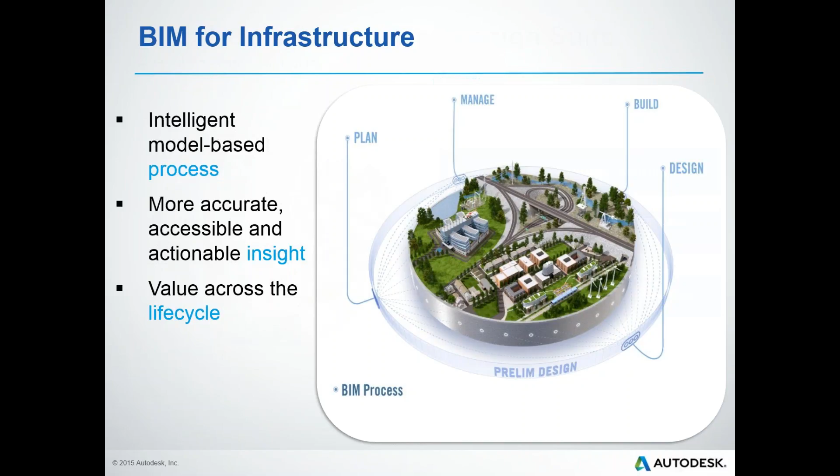So the Infrastructure Design Suite is a comprehensive BIM for infrastructure software solution that combines intelligent model-based tools that help you gain more accurate, accessible and actionable insight throughout the project's execution and life cycle, whether it's transportation, land design, utility, or water projects.

With the Infrastructure Design Suite, you can improve project delivery, maintain more consistent data, and also respond more quickly to changes within that process. Clearly, they're smarter, faster, and mobile.

So one way of improving project delivery is to build infrastructure models with the ability to access more data, incorporate detailed models from products such as Autodesk Revit, Map3D, 3ds Max, Navisworks, amongst others.

You have the ability to improve, incorporate detailed data from 2D drawings, 3D CAD models, GIS, City GML, and also raster design. So you should be able to take advantage of these types of data and integrated geospatial analysis to support any project decision that you have.

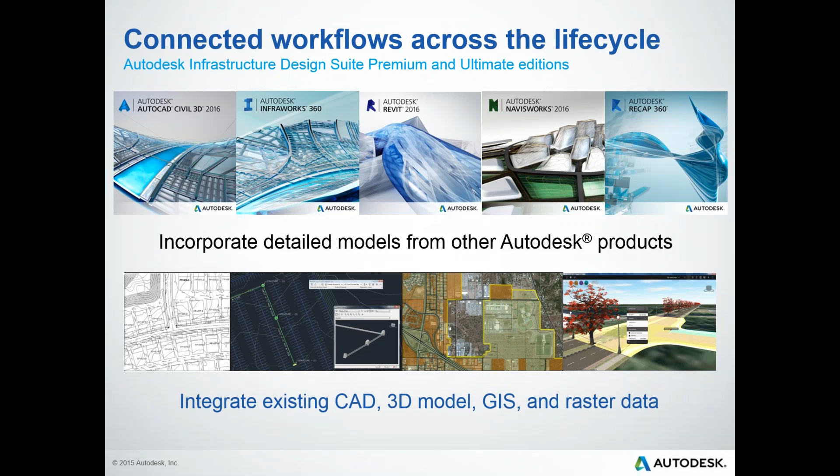Also, you'll have InfraWorks 360 available. Some of the benefits of InfraWorks 360 include foundational sketching and modeling capabilities for creating 3D models of an existing environment and generating data-rich design concepts.

So all that I just made reference to with raster design, Civil 3D, Map 3D, and Revit can be used within InfraWorks also, giving you the ability to sketch roads, bridges, and water features more directly with your model, and also being able to create proposals with design concepts within a single model.

As you know, the ability to conduct comprehensive environmental analysis is very important, and today that process is much faster. This slide illustrates how you can work with data natively from CAD and GIS data formats, including Bentley, Esri, and Esri Arc SDE managing a database, which has spatial data stored in it, also in Oracle, and then also coordinate systems. We'll take a look at some of these things. This really enables you to minimize data conversion, data loss, data copies, and stagnant data.

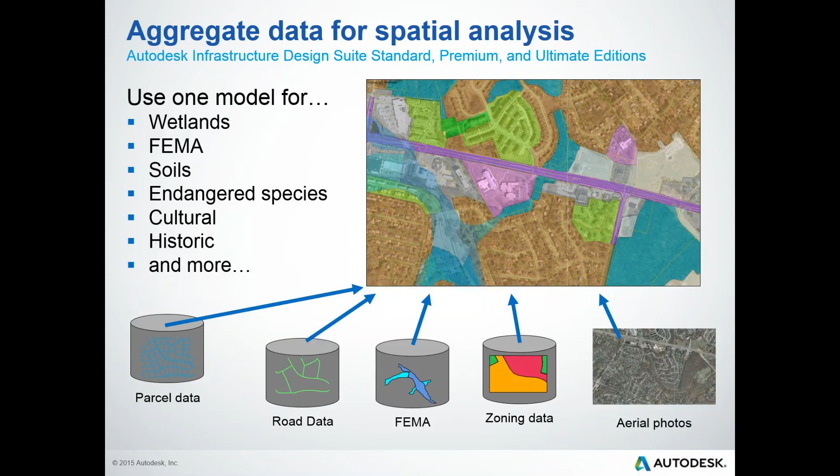Powerful visualization tools are always going to be a key component of competitive differentiation, and more quickly the ability to capture necessary project approvals. By communicating these designs for project proposals to stakeholders, we know it can be very time consuming. Within the Infrastructure Design Suite, we can complete compelling visuals developed directly from project data into the stage of your project, also near photorealistic renderings and animations to help better communicate project information to stakeholders and clients.

So we also want to be able to maintain more consistent data, context, and processes. Let me stop right back there, and we'll jump back to my current slide here.

So some of the benefits of the Infrastructure Design Suite: civil, utility, structural, automated machine guidance, sequencing and scheduling, estimation, documentation, construction simulation with Navisworks, also visualization with 3ds Max and InfraWorks 360, field survey, geospatial, and also reality capture.

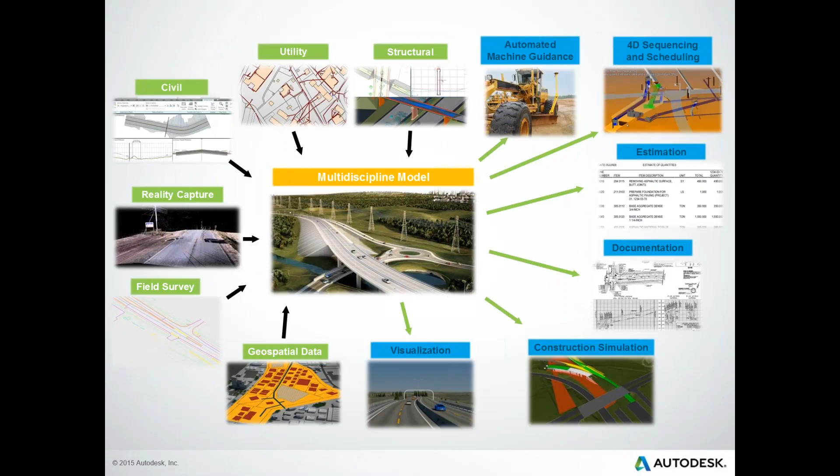Performing storm and sanitary analysis - you have tools included in the Infrastructure Design Suite, such as Autodesk Storm and Sanitary Analysis software, which helps you perform hydrology and hydraulic analysis for planning and designing urban drainage systems, including highway and sanitary sewers. Storm and sanitary analysis allows you to simulate and model complex hydrology, hydraulics, and water quality. It can be used for highways, subdivisions, bridges, culverts, sanitary, pump stations, lift stations, and force mains.

There's also a document that shows all the capabilities of SSA, which is loaded onto your machine once you load the Infrastructure Design Suite.

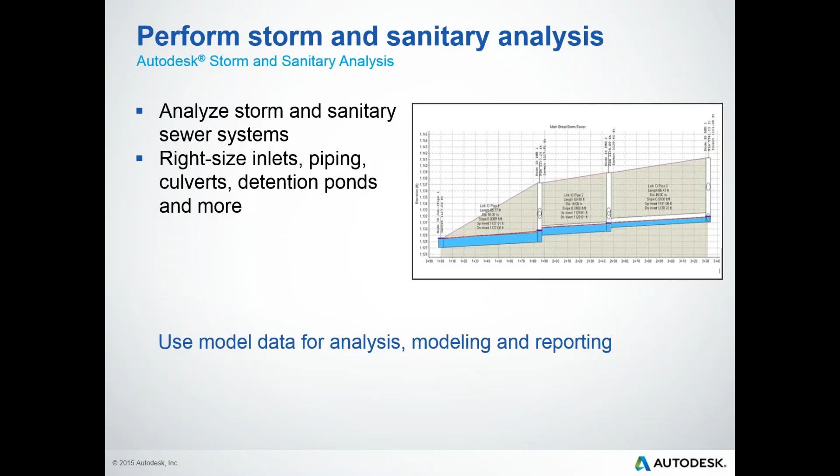You also have river analysis. With river analysis, you're able to automate HEC-RAS cross-section data, water surface analysis, floodplain mapping, and all that's related to modeling tasks. You can utilize numerous automation mapping tools, perform sophisticated bridge and culvert analysis, and also perform automated bridge scour computations for Federal Highway and State DOT studies. More importantly, you have the ability to generate floodplain and floodway maps for FEMA and other agency submittals.

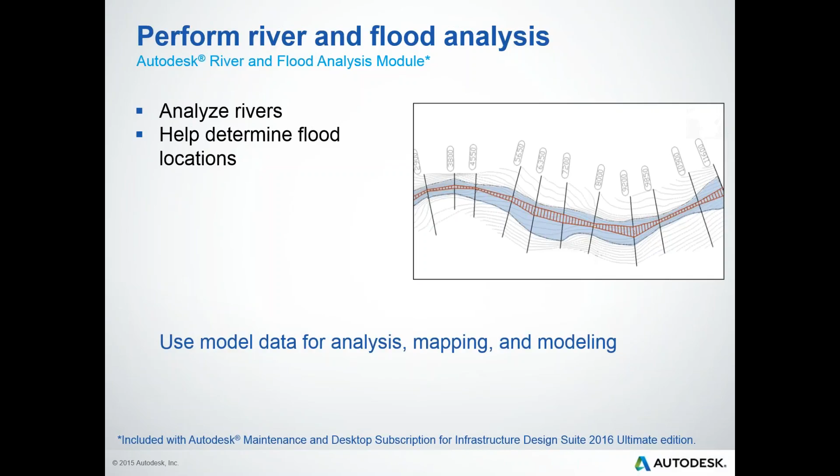You also have the ability to integrate geotechnical borehole data, streamline the import, and use in documentation of borehole data, also included in Infrastructure Design Suite.

So bridge types, girders, steel or concrete, and also bridge elements for abutments and piers, bridge decks and barriers. And then Civil 3D bridge widths, the ability to put in cross slopes based upon your corridor model, and pier and abutments.

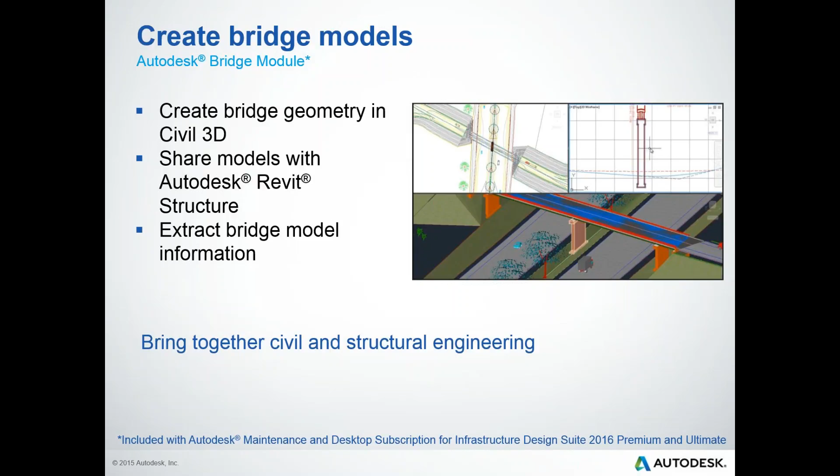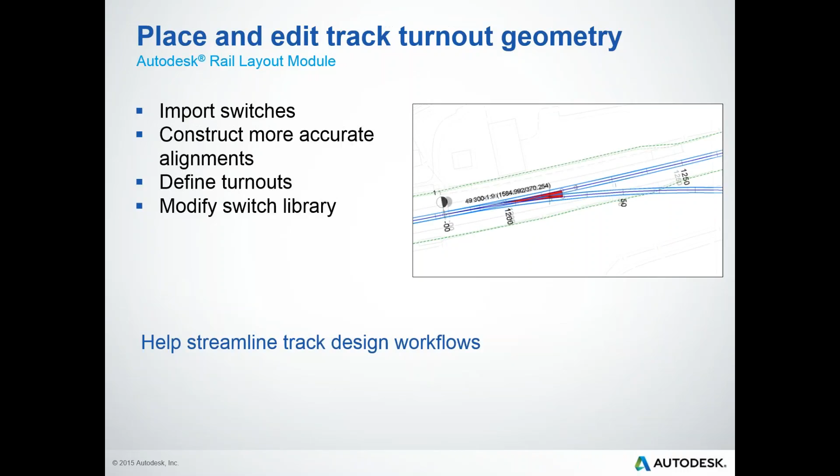Now, how do we respond more quickly using BIM and the Infrastructure Design Suite? We have the ability to design faster, incorporate faster models, even when changes happen at the last minute. Design elements such as profiles, alignments, corridors, as well as annotation labels are interrelated and dynamically linked, so when one change is made, you can quickly see its impact on the project.

For example, for design profile changes, we'll immediately see the effect in the corridor, and we'll take a look at some of those things. You also have the ability to save time and reduce numerous errors and omissions by introducing design changes rather than entering them manually.

We also have the ability to style and layer, and set up visibility standards. This gives you more time to spend optimizing your design and less time worrying about how something should look. So standards are easily imported from a template to allow you to get more work done.

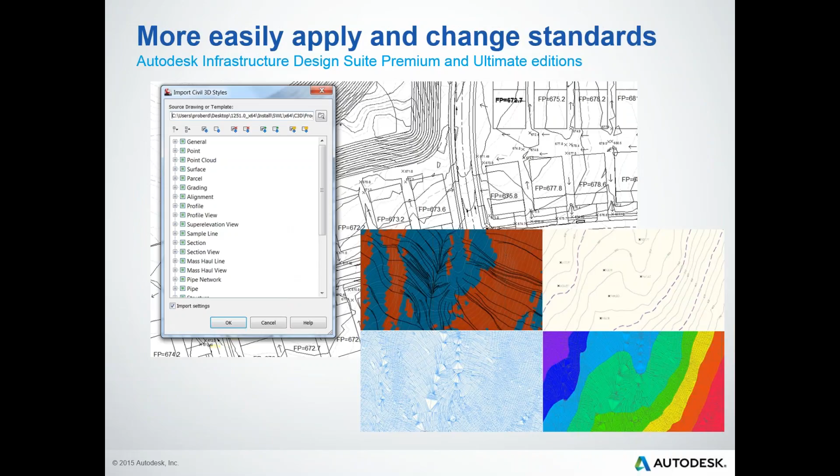We also have simulate 4D construction, the ability to perform quick quantity takeoffs, model and compute earthwork volumes, and deliver high quality models to contractors. Simulate construction processes and 4D construction sequences to optimize staging and scheduling. And then, of course, delivering construction documents for projects that could be time-consuming, error-prone.

Again, the ripple effect through related design changes are throughout Civil 3D. So, and then also being able to use built-in wizards that allow you to take advantage of management tools, configurable styles, standards, and sheets and sheet sets.

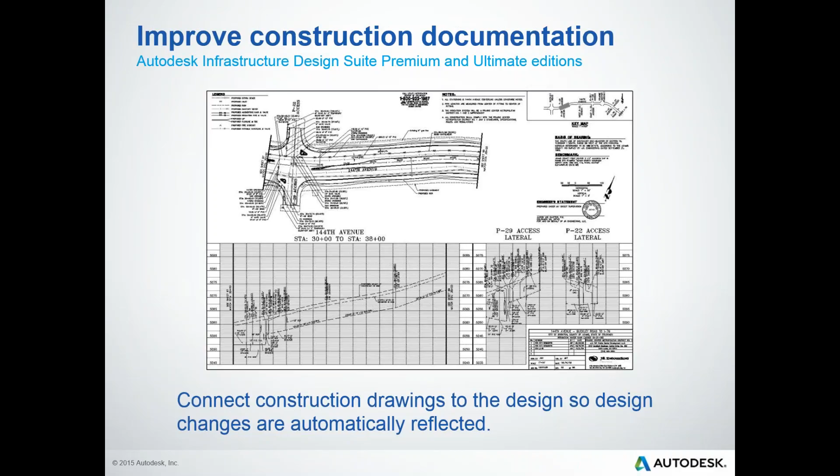Also included in the Infrastructure Design Suite, we have Navisworks. Within Navisworks, we can utilize clash detection, interference management capabilities. If interferences are identified, the link back to the Civil 3D model enables engineers to more quickly update designs and documentation. So projects holistically model constructability and perform clash detection. With teams, you can more effectively identify errors early in the process to help you minimize project delays and rework.

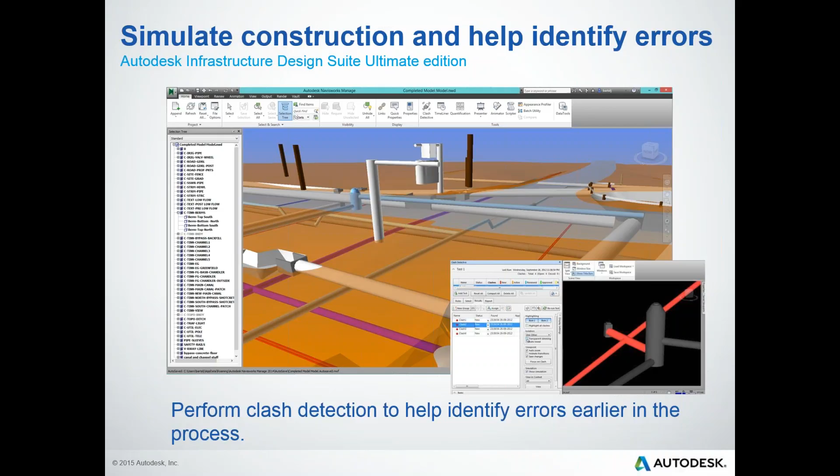Also, we have design electrical distribution networks, design overhead and underground structures, electrical components, built-in configurable rules, workflows, and standards, and also conduct engineering analysis to size facilities. So really the ability to improve design accuracy, analyze, optimize networks for greater performance and reliability.

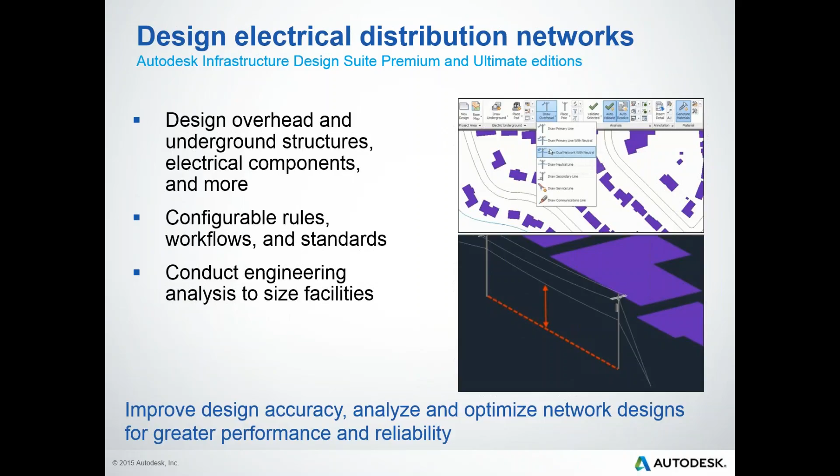We also have a more comprehensive BIM workflow in reference to using intelligent industry models straight out of the box with the Infrastructure Design Suite. So GIS and asset management, network analysis, and connected facilities.

More comprehensive BIM workflows. So let's start with InfraWorks 360. You can go anywhere in the world, grab aerial photography, topo data, road information, anywhere in the world.

In the early stages of an infrastructure project, teams can more efficiently generate quality comments and have a solid understanding of design concepts with InfraWorks 360, collectively with Civil 3D. Again, InfraWorks 360 offers a foundational sketching and modeling capability. Also, you can more quickly develop design concepts in detail to help stakeholders better decide for possible projects.

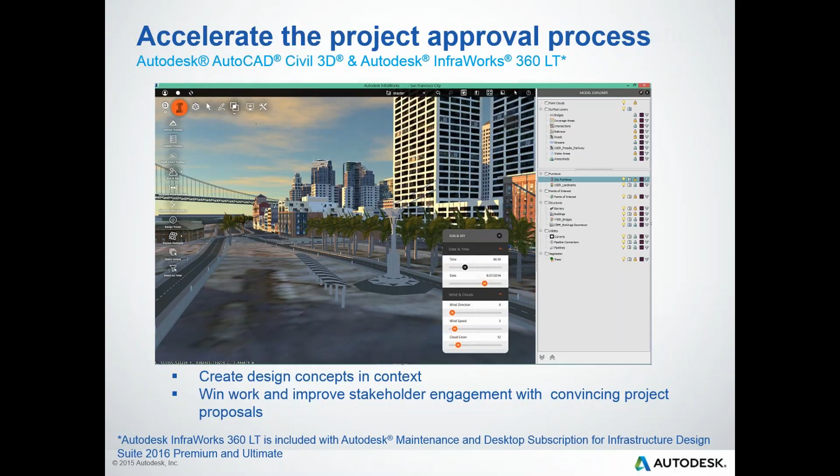Once an agreement can be reached, then you can push that data straight from InfraWorks into Civil 3D, where you can model, analyze, and document that data that came from InfraWorks. Also from Revit.

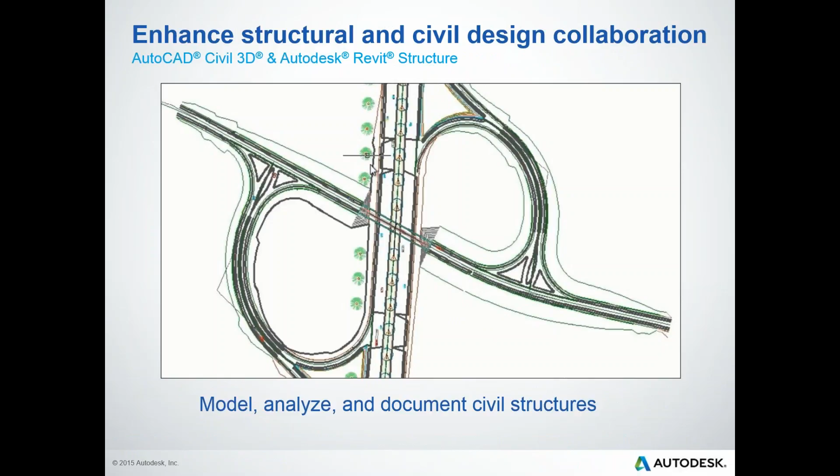And last but not least, you also have the ability to work with 3ds Max. By making visualization an integral part of your design process, teams can better evaluate and communicate design stages also. Content in 3ds Max retains its relationship with the 3D model from Civil 3D.

As the project evolves and the design model is refined, those changes can be easily incorporated back into the existing visualization, minimizing the need to rebuild over and over again.

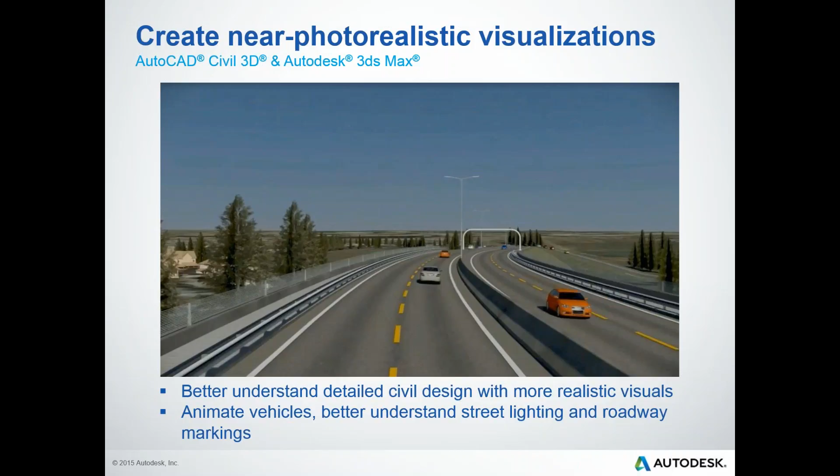And not only can Navisworks simulate as a part of the Infrastructure Design Suite, also with InfraWorks 360, you have the ability to utilize traffic analysis.

And last but not least, also using raster imagery, creating vector objects, text from scanned drawings, other images, old TIFF images, cleaning up raster images with image editing tools, also the ability to edit, transform, and create georeferenced images. Raster being used on any AutoCAD platform.

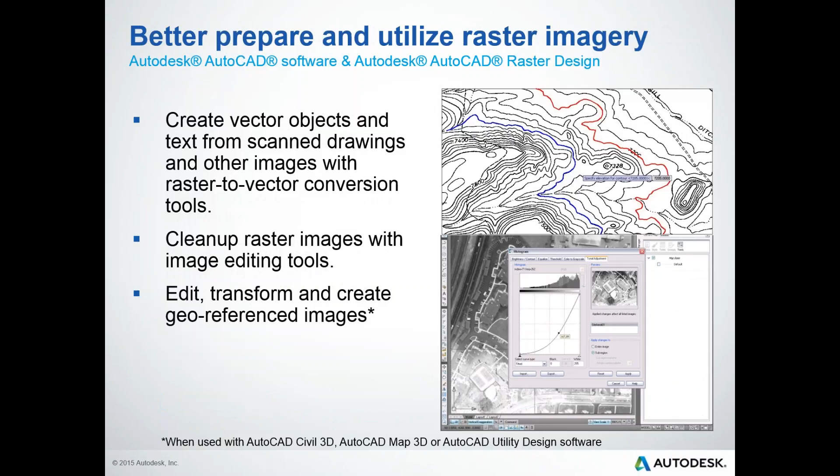And not only do you have those numerous products, you also have AutoCAD Utility Design. Coupled with Map3D, the ability to run queries for existing GIS and asset information into CAD, also design new and updated utility networks, and also tie into an asset database so you can edit, modify, and also design from as-built information.

Clearly, a common challenge is always updating as-built records once a project is complete. This is where Map3D and AutoCAD Utility Design can really help.

Hypothetical project, typical processes outlined: establish connection to GIS database, set up mapping, design new distribution network. When the design is complete, reconnect to the database and merge those changes.

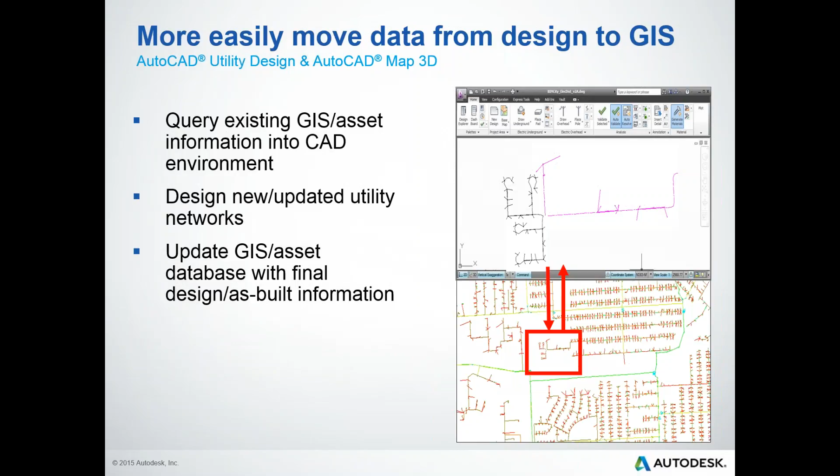Clearly, visualization from InfraWorks, we'll take a look at that also. I'll go back. Clearly, visualization from InfraWorks, more economical and convenient. Ability to access data, utilities underground.

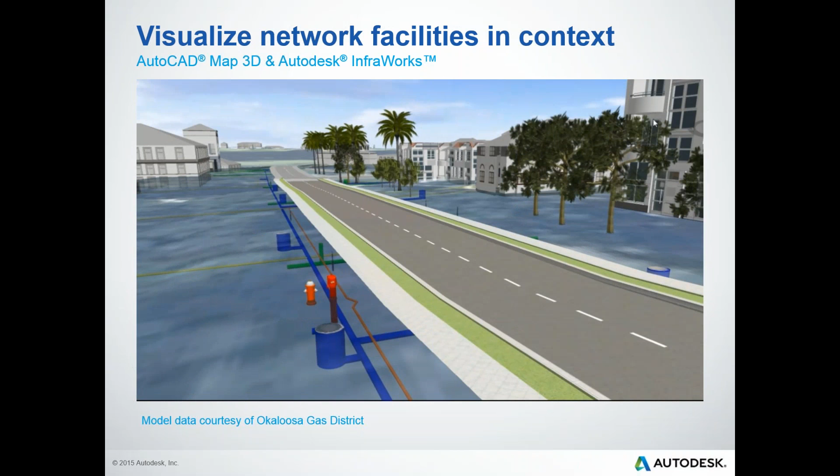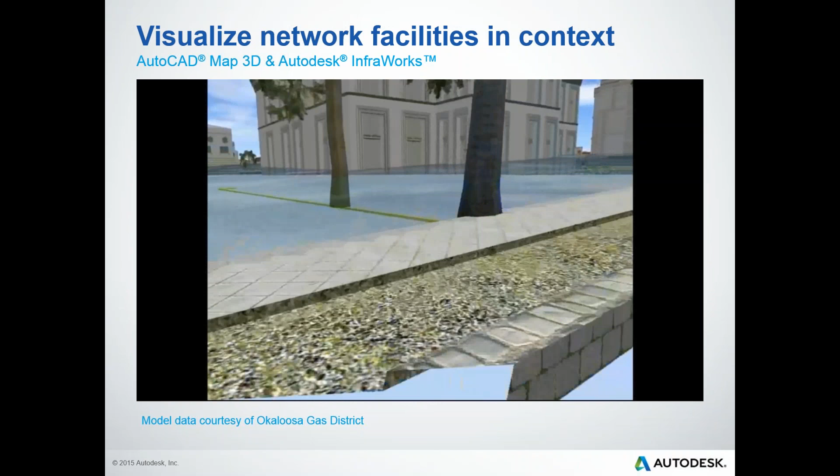So as the owner and manager of this data, you want to be able to respond to requests for information. It's important to provide requesters with accurate data so they can better understand as-built information and communicate that to stakeholders. These requests could be from operations to maintenance teams to scheduling maintenance activities. So again, whether it's utilities, city departments, or a private contractor, you have the ability to provide them with a network of information that makes it easier to understand.

Clearly with Map3D, you also have the ability for GIS back and forth from Esri.

So you really could provide a compelling 3D visualization that helps individuals or recipients to better understand all these results in reference to this model.

The Infrastructure Design Suite has a standard, a premium, and ultimate part. And then clearly, we want to be able to talk about Civil 3D and the Infrastructure Design Suite demo.

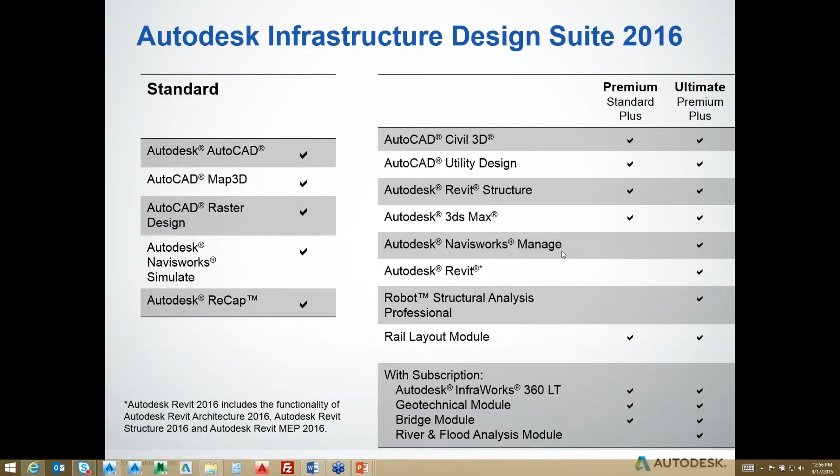So what I want to be able to do is, because I don't like to PowerPoint to death, just go through a few things in reference to some of the tools that you get with the Infrastructure Design Suite.

So clearly we have Civil 3D here. And one of the things we want to take a look at is the ability to bring in data.

Let's think about what we typically get. Let's say we have an architect and he gives us this kind of temporary site plan.

One of the things that we are able to do, I'm just going to open up a drawing as if I got a temporary site plan. So let me come in here and make it nice and simple.

So this is the typical workflow that a user would possibly go through. I'm just going to go to my AutoCAD workflow, and then this simple drawing - we have a building plan here.

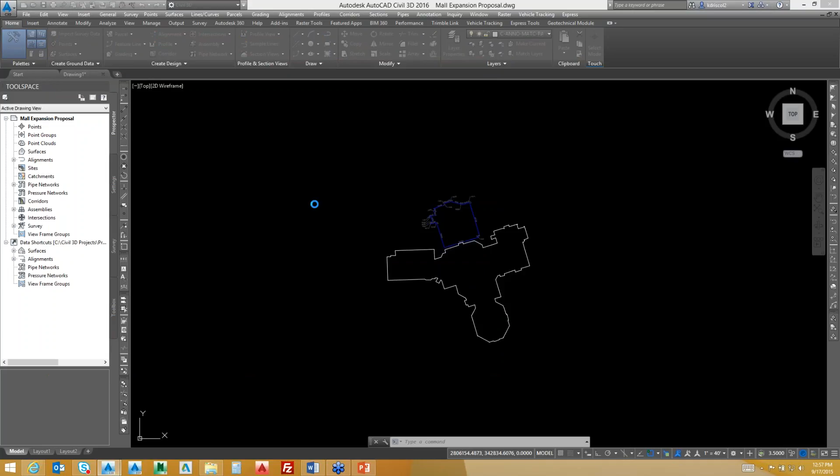One of the things we want to do is, this mall has an expansion that's planned, a proposed expansion, and we also want to produce a proposed intersection and layout.

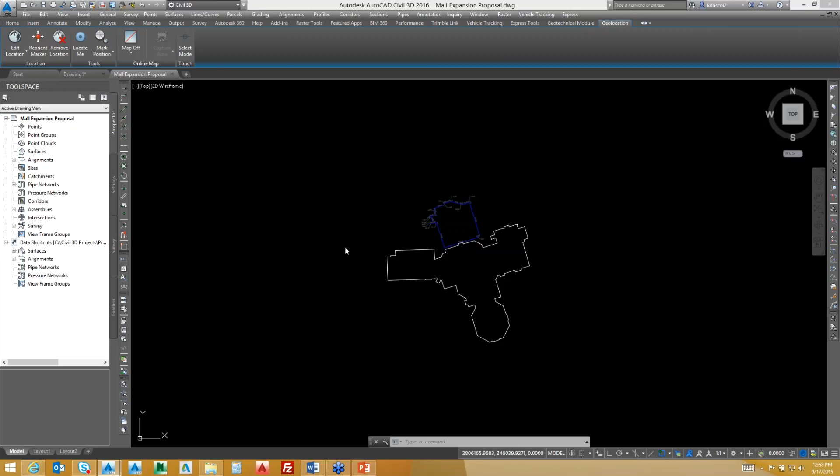So one of the things I want to do, I'm going to open up another drawing. I've just received this drawing from an architect who's got some distances measured. Let me zoom in - it's got some distances measured across in terms of a quick little site plan.

But as a civil designer or engineer, now I need to come in. So one of the things we want to be able to do is create this intersection of this road here, and then also create center lines for this road, and then what this building would look like.

So this project was done at some point, so we have kind of this site plan. The first thing I want to be able to do is utilize some project data. The data comes from Esri, MicroStation, and other file formats.

So to show you how flexible you're able to work within Civil 3D, I'm just going to go to my project data. Let me just pick on that.

One of the really nice things that you're able to do with Civil 3D and data - I'm going to come to my base data right here. I have shape files, I have a surface file.

So just as an example, if I go into my shape files within Civil 3D - and you do know that Civil 3D is built on AutoCAD and Map 3D - the first thing I want to be able to do is, I just want the ability to bring in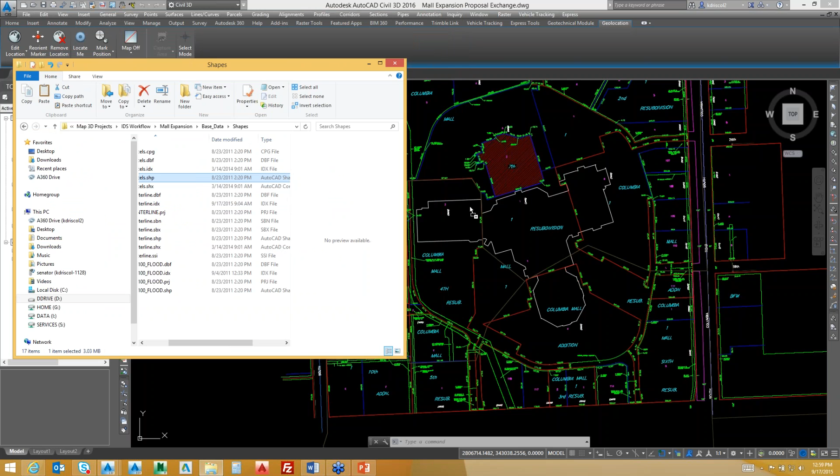some parcel data, just to make myself aware of what's going on. So I do have the ability to bring in parcel data with Civil 3D, and that parcel data is a shape file.

So again, I want to really try to develop a concept plan. Civil 3D is built on top of Map 3D, and as you will see, as I pull in data, I'm just going to click on my map task pane.

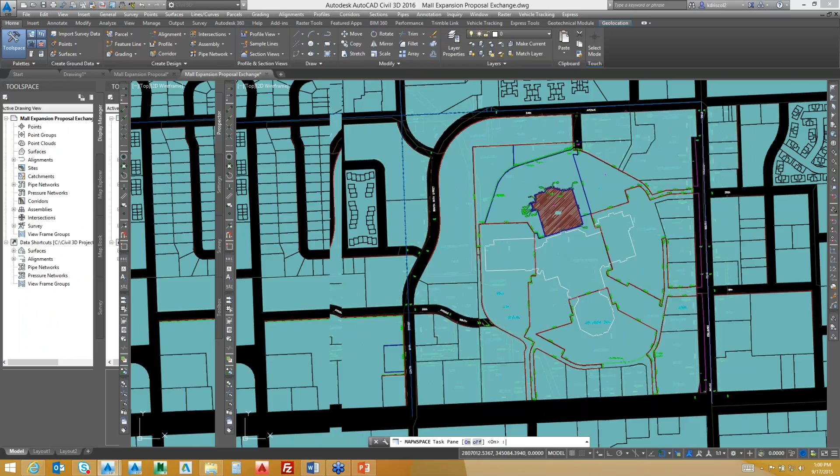So something real quick, you can see that I have city parcels. One of the things Map 3D allows you to do, for quick access, is stylize based upon attributed data brought in from an Esri shape file. So under property, maybe I want to select zoning. I have a PUD, so under PUD name, I'm just going to put it in, and select OK.

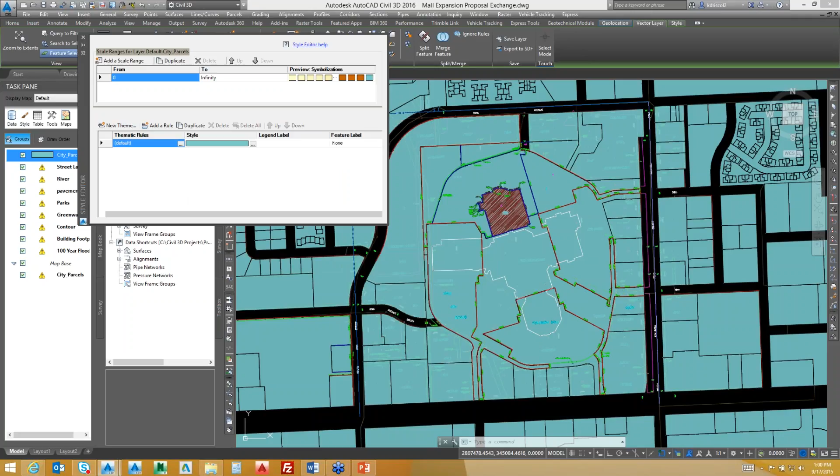So whether it's a university, a village, Valley Memorial Homes, or a campus, all these can be accessed and displayed in my map.

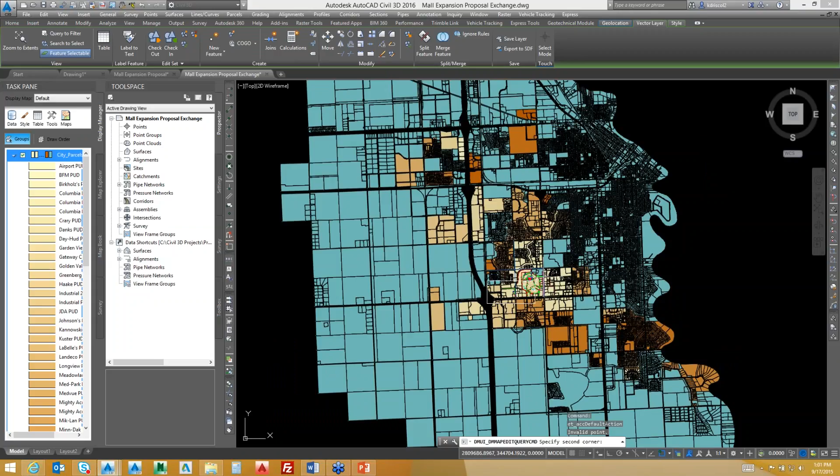The beauty of working with Map 3D is sometimes you just want to work with data within a specific area. So you have the ability to go in and select a location map. Anything inside of this area I want to use with my mapping. Pretty straightforward.

And if I wanted to cut that off, it's pretty straightforward. So the ability to drag and drop data specifically onto my map gives me a lot of flexibility.

So go back to base data. Maybe I'm talking SDF files. One of the things I need to be able to do is define what this site looks like. So I just have a DTM contours SDF, spatial data format, and I'll just drag it right in. Here's my contour map. Pretty straightforward.

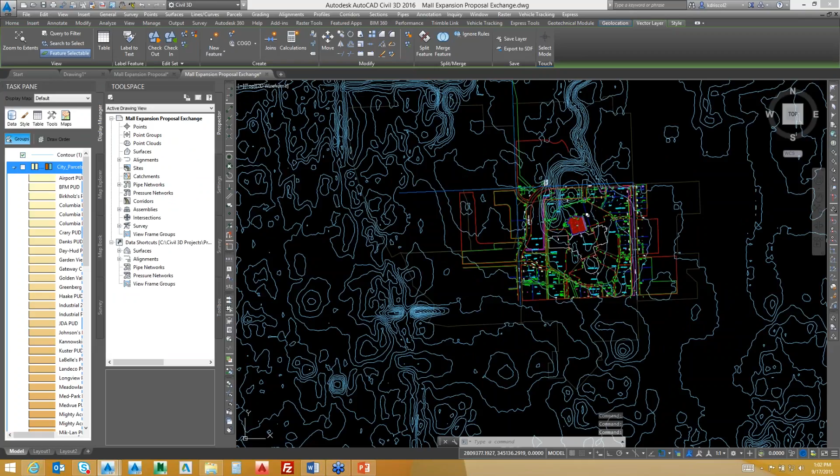There's flexibility in reference to the data you're working with in terms of Map 3D to develop this concept plan. So at any point in time, I could cut those contours off.

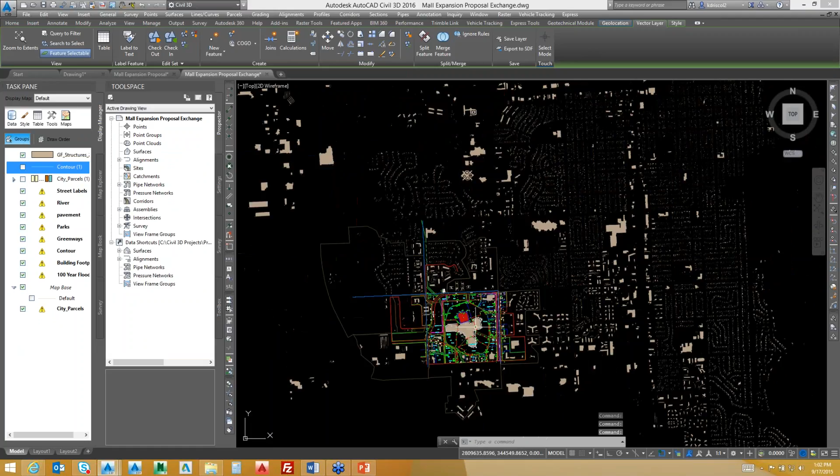I have the ability to drag in layers of information, just dragging and dropping. So even if I wanted to drag and bring in all the buildings in a specific area, I have a lot of flexibility in creating this concept map that I'm working on.

So we've seen those contours. One of the things I want to do is develop a topo from those contours. So what I've done, for time purposes, I'm going to start working with Civil 3D now. I really don't need my map pane up.

I know I can bring in pavement, generate flood plains. A floodplain, something as simple as a 100-year flood, I can bring that data in also to delineate what's going on with my site.

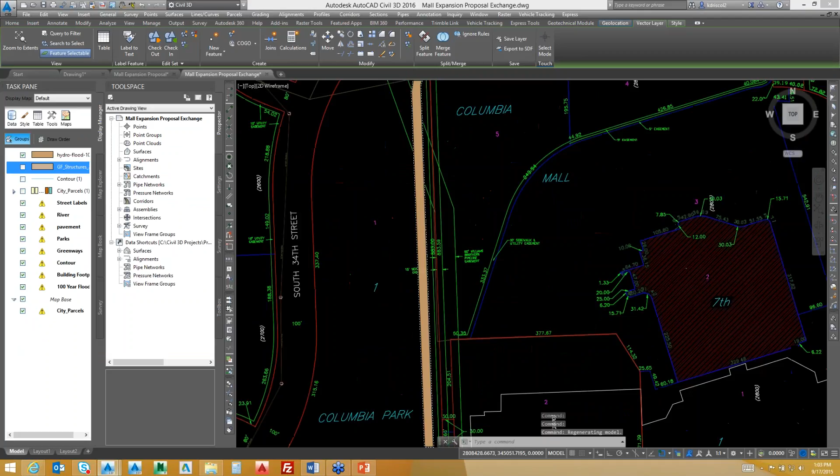Again, a lot of flexibility in terms of what you want to display as you're creating this concept plan. So now let's think about what we can do with Civil 3D. Because we have the map functionality, I can bring in parks, greenways, pipes, pipe networks, river locations, 100-year flood plains. We know we can do that.

But now we're looking at working with Civil 3D, so we're beyond the map part. Now we want to bring in data to do detailed design. So one of the first things I want to do is bring in some points. I'm just going to select my little handy button here, import points.

Before I import these points, one of the things we typically run into is we just open up a drawing and say, okay, I'm ready to start. But working with Civil 3D, we want to slow down and consider that Civil 3D works with the idea of styles and how things are presented. And you can clearly see I got this drawing from an architect, so I just have really an AutoCAD drawing.

So what I want to be able to do is, one of the things I mentioned in the PowerPoint, is you have the ability to pull in a template that gives you styles so you can have standards to represent your company. So I'm just going to save this drawing, no big deal, just a quick save there.

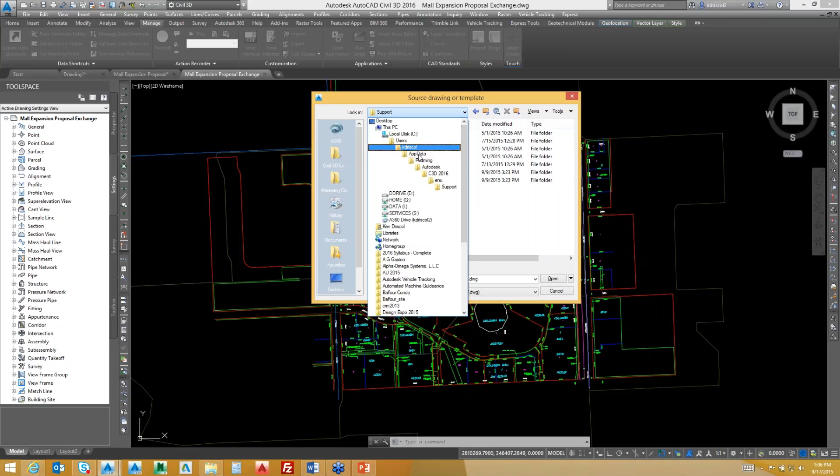And then if I come back to my local, application data, local, Autodesk C3D 2016 ENU, under template, I can pull this AutoCAD Civil 3D template. Clearly, we don't have any styles in this drawing, so I'm just going to select open.

It's going to run the process of analyzing that drawing, and then show me all the different styles that are going to be added to my drawing. I'm just going to select OK, then select OK again. And a couple seconds later, you can see the little bar down there accumulating and importing styles.

Then it's verifying those imported settings that it's pulling in, and it says successfully imported 543 styles, 1,400 settings. Then I'll select OK. That's all I have to do to bring in styles into Civil 3D.

One of the most fundamental headaches that users who work with Civil 3D face is that they get drawings from users who don't have Civil 3D, and then they have to create all their styles. This is the simplest way to get all the information from a Civil 3D template that you can utilize in a BIM environment quickly. So now that I have all my styles, I'm ready to bring in some points.

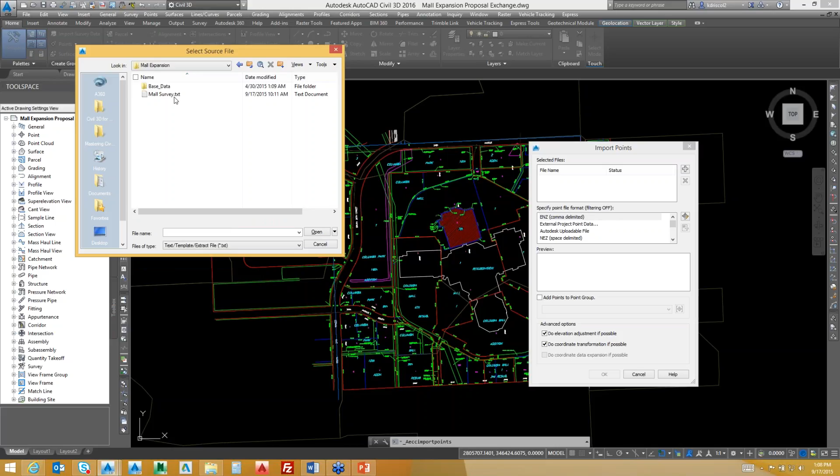The idea behind points is so I can generate a topo survey from my points. So again, up at the top, I'm going to import points. I'm going to come to my folder here, and I'm just kind of jumping around, which is what a typical user would be doing, to find data. So I'm going to go in and find the Mall Survey, and I'm just going to select open.

And then what Civil 3D wants you to do is match the data in reference to the file to this file format that can be brought straight into Civil 3D. I'll just select OK, and it'll take a second here. And now you can see some form of dots that have been generated on my drawing.

Again, because this drawing was created with Map 3D, it's kind of set up for everything that's standard. But if I come to my Prospector tab and go to Point Groups, All Point Groups, I'm going to right-click and go to Properties. As you can see, it's imported all my points into my drawing that has elevations for me to generate the topo. I'll select OK.

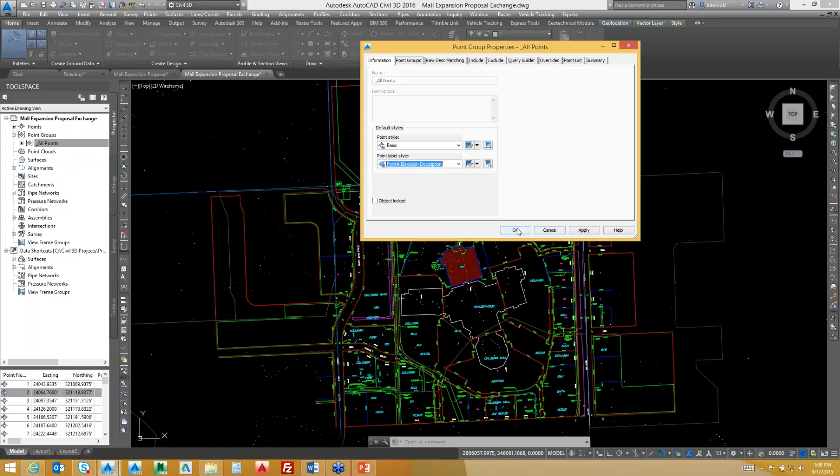I'll right-click on all points, go to Properties. I'll go ahead and set up now how I want my points to be displayed. I'm just going to say Point Style Basic, and then I'm going to select Point Number, Elevation, and Description. I'll go ahead and select OK, and it'll take a second.

So now these points look a little bit different, but they're still minuscule in terms of size. So again, coming from that AutoCAD drawing that someone gave me, I maybe just want to come in here and change my scale in terms of what I wanted to utilize. Right here, I don't have a scale that's set for imperial and decimal, so I'm just going to create a custom scale. I'll come in and add, and I'll say I want a scale that 1 inch equals 50 feet.

And I'll just say 50 feet, and select OK. Then I'll come in and select that scale, 1 inch equals 50 feet. It'll take a second. And one of the things in the PowerPoint that I mentioned is that everything's dynamic, it's related. So now the scale of my drawing, any of my labels or my text, dynamically updates.

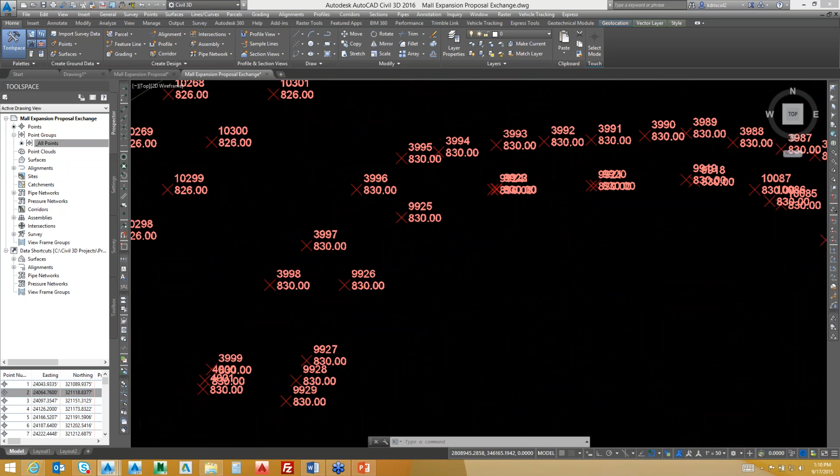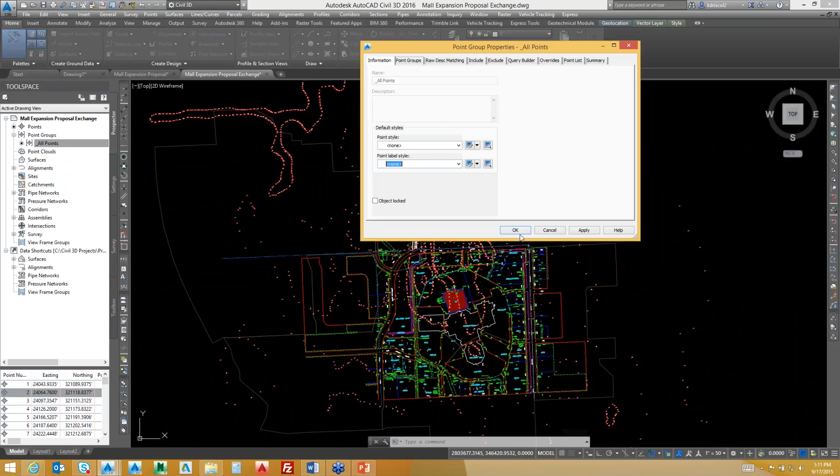Okay, so now that I have my points, and I really don't need to display these points, I just wanted you to see the ability to scale these points on the fly dynamically. So I'll just go right back under points, go into properties. I'm going to select none, and then select none again, because I don't really need to see my points, since the idea behind what we want to get across with the Infrastructure Design Suite is that we're moving to this BIM process in terms of things that we're building.

So we want to build this model based upon points. I'll just go over here on the surfaces, select create a surface, and I'm going to call that existing topo. 2 and 10 background is going to be fine for my style, I'm just going to go ahead and select OK. I'm going to go over to my Prospector tab, expand my existing topo, and then I just want to build that topo based upon the point group that I just brought in called all points. I'm going to select OK.

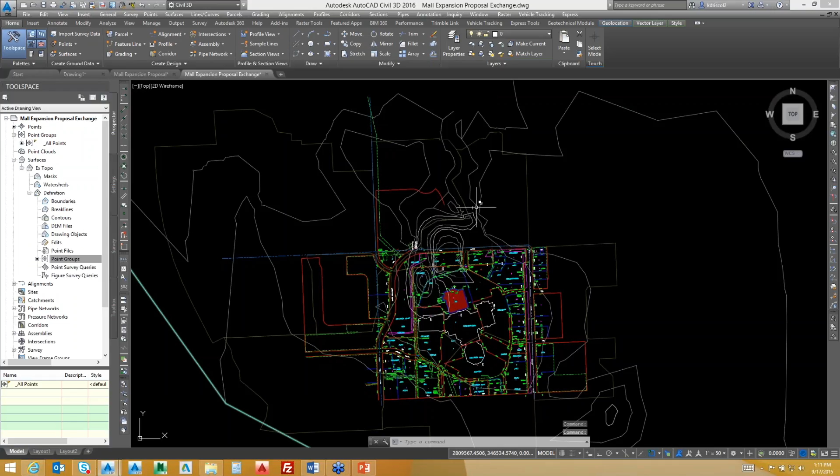Existing topo. So pretty straightforward, but now I have this model built. And I can get really defined in terms of what I want to do, but you can clearly see that there's a topo for a site that's built there.

One of the things I wanted to be able to do is bring up this intersection down here. With Map 3D, we're able to bring in our building expansion for the mall, so we have a location there. If I pick on it, you can see there's just line work that's been brought in for my location of the mall, dimensioned out right on top of where the architect wanted it to be.

And now, since I'm in design mode, I want to look at this intersection. What I want to be able to do is insert a block, because, you know, I could go back to Map and kind of drag in pavement.

If I go back one time, under shapes, I can come in here and say I want all my center lines. There's my center lines. But what I've done, I'll just undo that one back, is I've just created a small center line area based upon that shape file, because I can extract from it.

One of the really nice things you can do now in 2015 and 16, if I pick on my shape file and right click, you can check this feature out, and you can also edit this feature. So you can see that it has geospatial data contained in my features that you're able to utilize now within Map 3D and Civil 3D.

So I'm just going to come back and insert a quick block. We all know how to do that in AutoCAD. I'll insert a quick block called center lines, and I don't need to specify it on screen, I'll just pop it right in there. So there's my block. I'm just going to explode it one time, no big deal. I've got a center line here, and I've got one here.

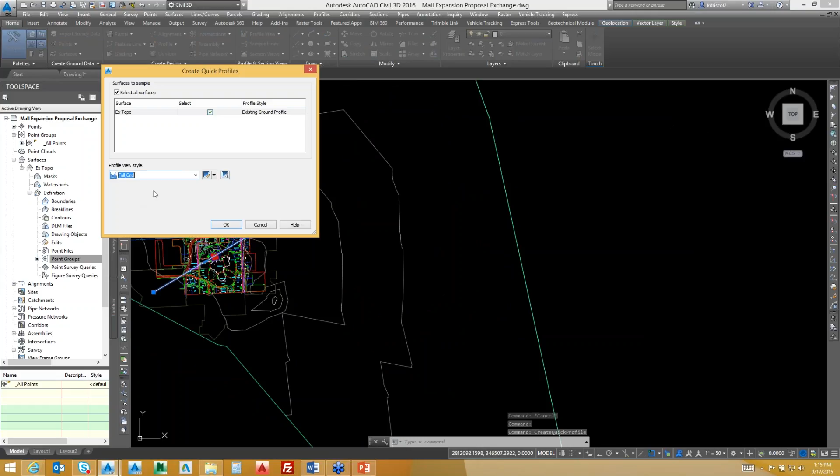So the idea behind BIM, building information modeling, is if I did something as simple as this, drew a line through the site, picked on this line, I come right over here and say I want to do a quick profile. A quick profile, meaning an actual profile of this site? I can generate an actual profile. So if I come back, pick on that, just erase that line, and it erases my profile.

If I come to my existing ground topo, I'll come to surface properties, and you can see I have modeling information that's been built. So the idea behind BIM and information modeling is we're building models.

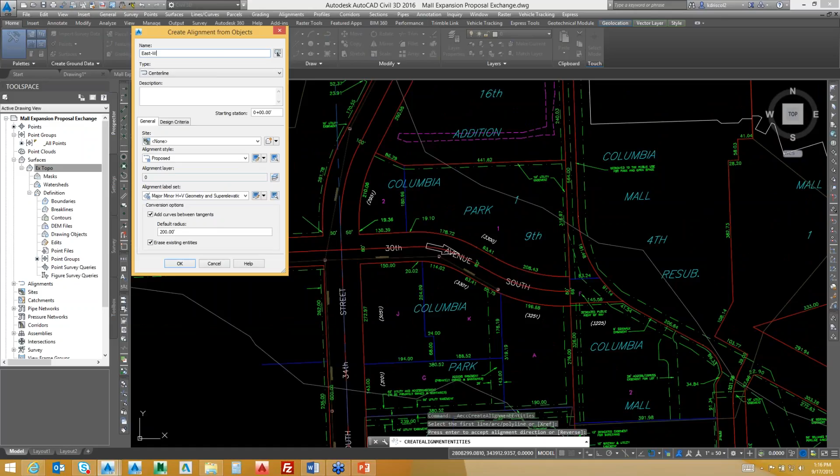So if I zoom in, if I pick on my polyline, I just want to create an alignment from it. I'm going to create an alignment from polyline, pick on it, and it shows me the direction it's flowing. I'm just going to hit enter. I could give it design-based criteria if I wanted to, but I'm just going to call this east-west, and it creates my alignment. Pretty straightforward, I can generate horizontal geometry that quick within Civil 3D.

I'm going to create another alignment from a polyline. I'll pick on it, it's showing me my direction arrow, and I'm going to hit enter. That's acceptable, I'm going to call this north-south. I'll select OK. I got some exclamation points there, which really make reference to my design-based criteria, and I'm not even going to use that in reference to my alignments, so no big deal.

The thing I want to be able to do is generate a profile. So if I pick on my alignment, or go up here to the top under profiles, I'm going to select create profile from a surface. It shows me my east-west alignment and also my north-south. I'm just going to use east-west first, add the topo, draw it in a profile view, then select first view, and select create profile view, and pop it in right there.

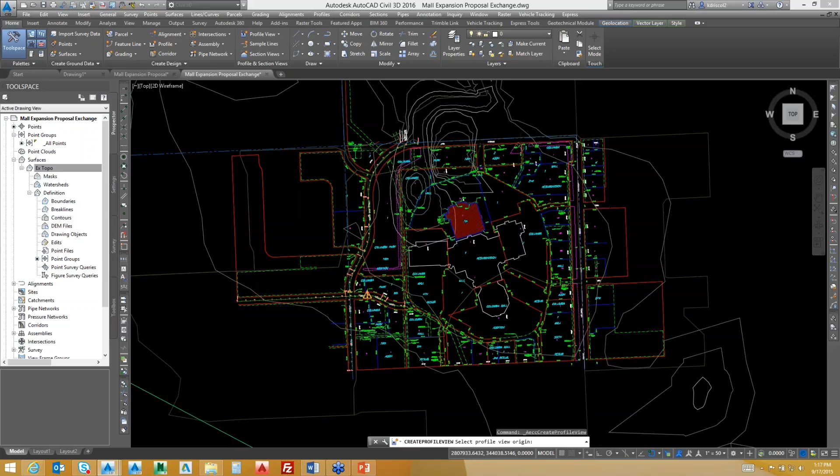So this profile, I'm creating a profile here. I also want to create a profile for my north-south alignment, so I add to it and draw it in a profile view. If you look in here, you can see the minimum and maximum. I'm just going to do something quick for time purposes. You can see if I go next, it shows me the length of my alignment, and then the profile height. Then I'll click on my profile display options, then existing, and select create profile view. So no big deal, create profile view.

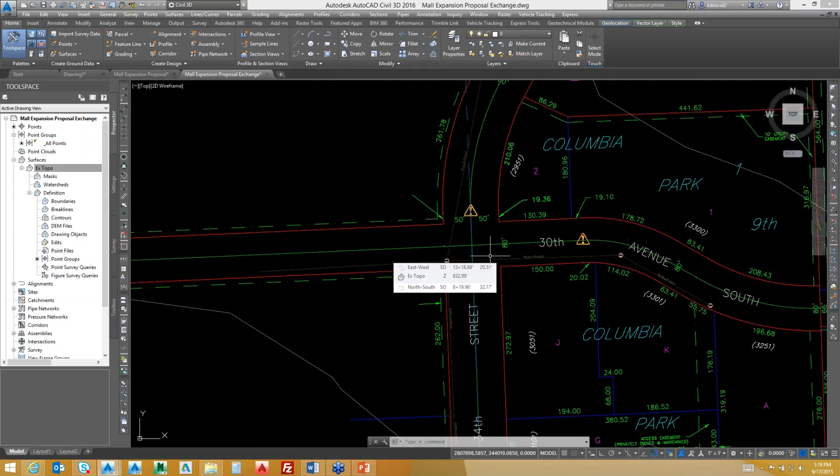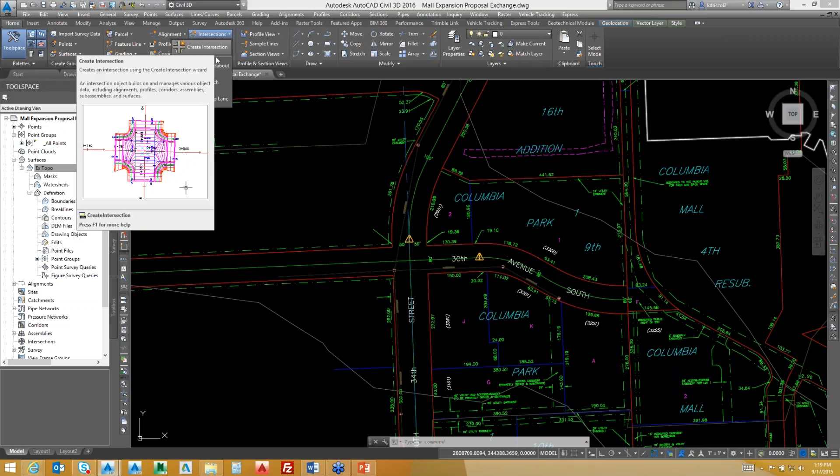So straight out of the box of Civil 3D, I'll just come up here and select create intersections. Clearly I can go in and define my finished grade for my intersections, which would be typical in terms of creating a finished grade, but I just want to create this intersection. You see I can hold my cursor here and it's showing my intersection in terms of what it would look like. So just as an example, because we have time parameters, I'm going to create this intersection without creating my finished grades.

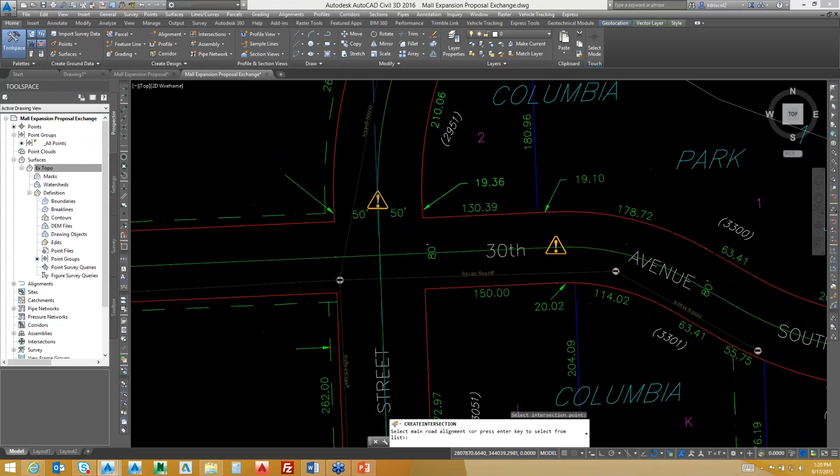Just want to see what it looks like, because we want to be able to do things really quick and professional. So I'm just going to select my intersection point, my two alignments crossing. Then I'm going to pick my east-west road first. And then it brings up this dialog box, and it says we're going to have an intersection here, and we can have it primary road crown or all crowns maintained. So I'm going to go extreme and say primary road crown maintained.

Then I'll go next, and it's grabbing my information automatically based upon what I created from my alignment and my profile. Again, the idea behind BIM is it's part of a process in terms of a model being built, and then you utilizing the data that's contained in the model. So I can go in and change my curve returns, as simple as that, and then it's going to grab information from my sub-assemblies that are right out of the box.

Then I'll just go ahead and select create. And then it says, well, wait a minute, you have specified dynamic profiles for secondary roads, what do you want to do? I don't have a finished design profile, so I'm just going to create intersections with dynamic profiles. I'm going to let it do it, because they may not match and they may cause uneven surfaces. But I just want to get an idea of some of the tools in reference to BIM.

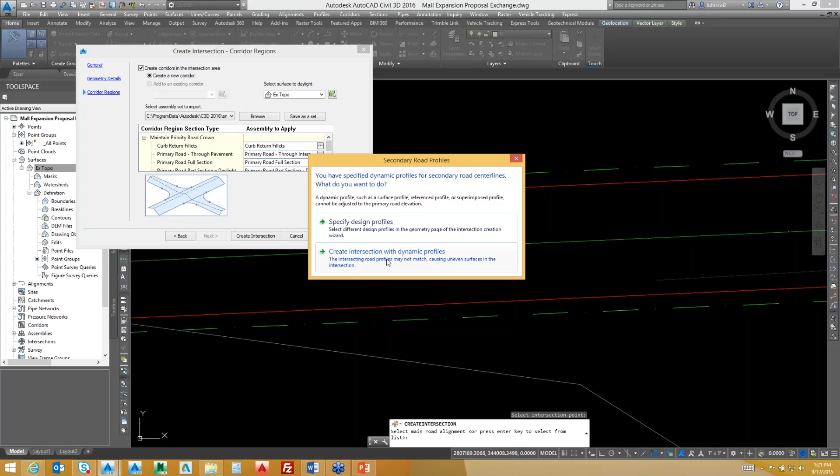So I'll select create intersection. And clearly, I'm not on the intersection, so it gave me a couple things in reference to what's not found. But for the most part, it's created that intersection. So how long does it really take you to do that and build a model in AutoCAD or in one of these other products that may be out there?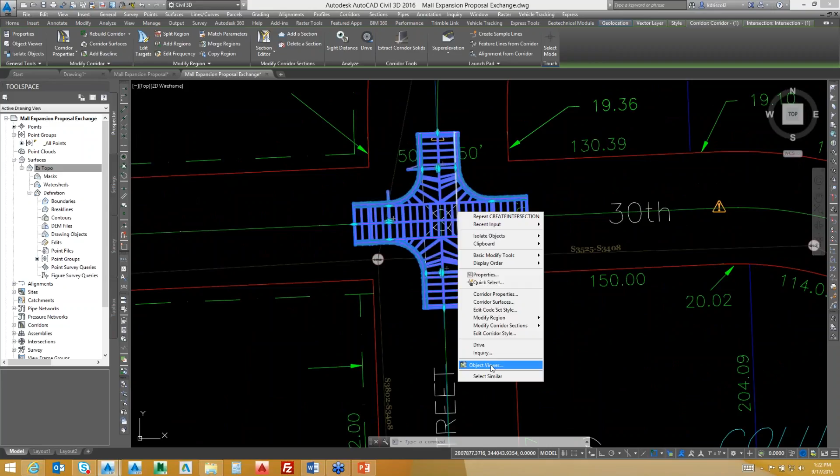So if I go ahead and select Object Viewer, you can see not only did it create that intersection, but it also rendered it. And if I zoom in, you can see not only my intersection, but you can see curb and gutter also.

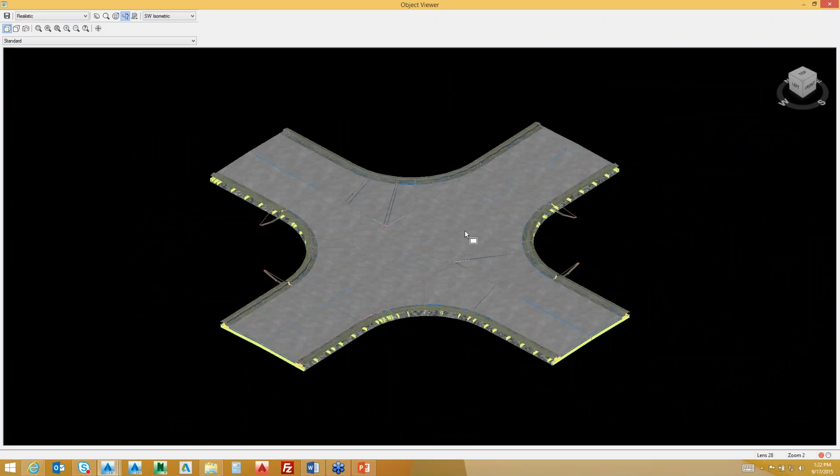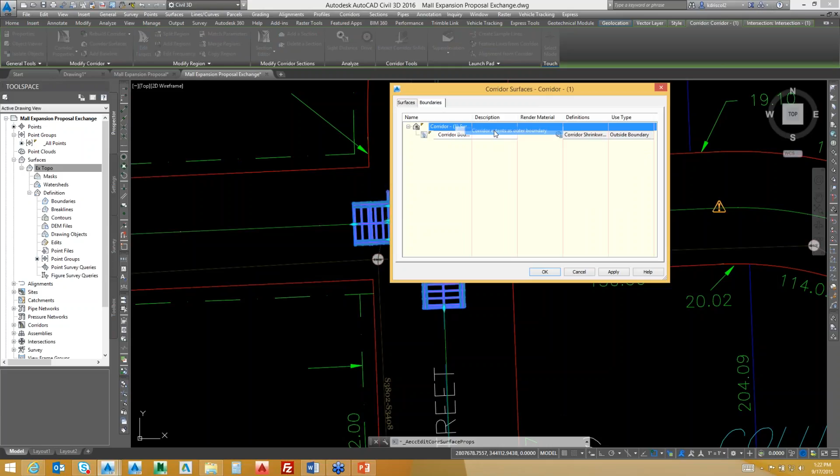So if I pick on this intersection, I can go up here to the top and select corridor surfaces. I'm going to create a corridor surface. This time I'm going to make it 2 and 10 design, and I'm just going to add just the top because I just want the finish grade at the top. Then I'm going to select to kind of shrink wrap the boundary of that corridor. Then I'm just going to select OK and select rebuild the corridor. And now I've built a surface for my corridor.

So if I pick on here and select my corridor, I'm going to right click and select Object Viewer. And there's my surface. And we're just going to come here and say Southwest Isometric. So there's my surface model.

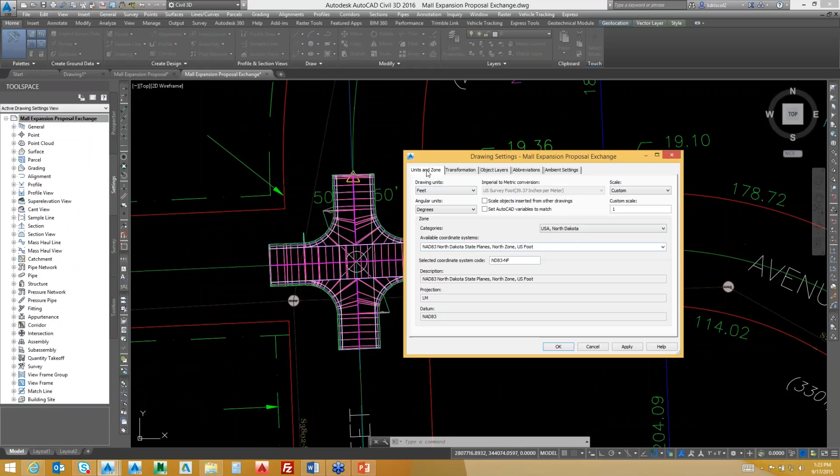So what I want to be able to do is if I come to my Settings tab, if I right click on my drawing name, you can see that this drawing has a coordinate system. And the beauty of working with a coordinate system in Civil 3D and this model is, now I want to be able to, as an example...

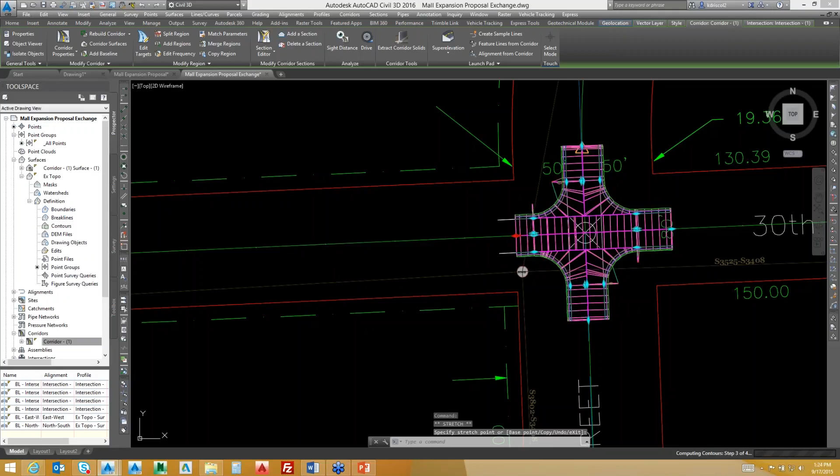If I pick on my corridor, and if I look down here on the corridors, I want that to rebuild automatically. I'm just going to pick on it and drag it out to here, something simple, and move it out a little bit. And then I'm going to pick on this point here, just kind of move that down a little bit.

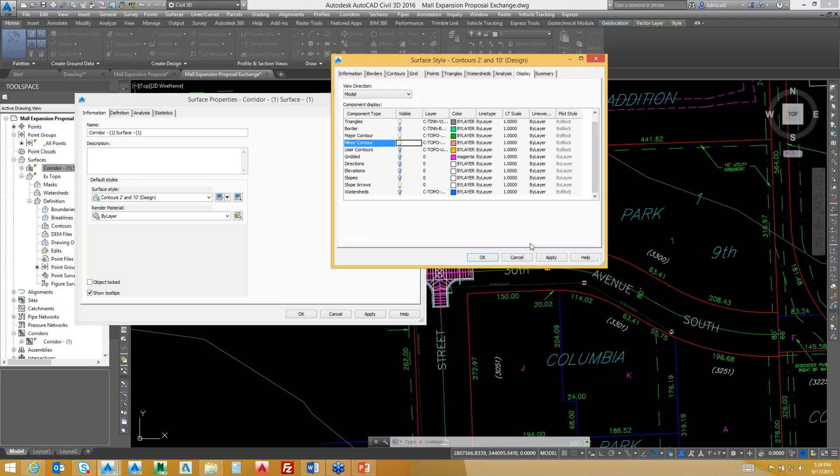So I have this intersection built. What I want to be able to do is on this corridor surface, on the 2 and 10 contours, I'm going to edit this surface. I'm going to turn on slope arrows, and slope arrows in my model, to give you an idea of what's happening with my intersection.

I'm going to select apply, select OK, select apply, select OK. Look at that surface model. If I come to Object Viewer, there's my intersection.

Again, building information modeling, so maybe I want to do some analysis now. If I select Analyze, I'll create this volume dashboard. I'm going to create a quick volume surface, and I'll just call it volume. In this volume surface, I don't even need to have a style, I don't have to display anything. I know I have this model that I'm working with, my existing topo as my base, my finished grade, which is going to be my corridor surface. I'm going to select OK.

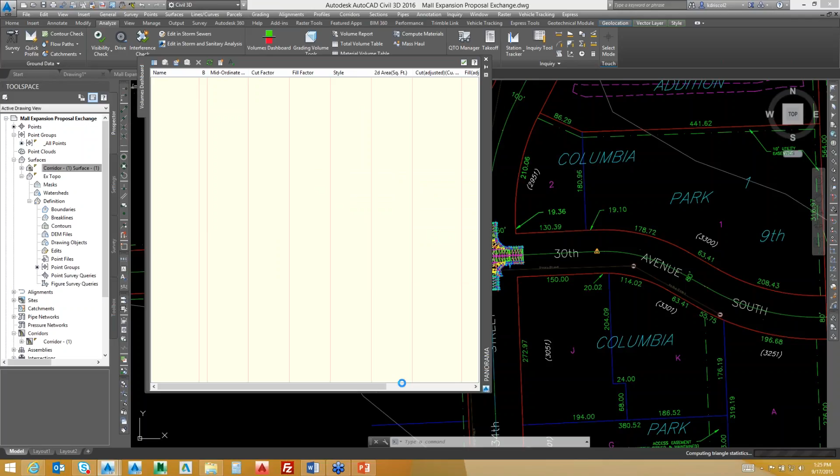I mean, how long does it take you to generate volumes in terms of cut and fill? Information modeling—it's where it's at, it's where it's been, it's going beyond.

Again, the Infrastructure Design Suite comes with multiple tools that not only support this process of BIM, but help design, create, and get projects out a lot faster.

So typically we run through the process of creating this data, and then what I typically want to be able to do—we can see also we have hydrology, storm sanitary analysis, also storm, and then also the ability to bring in data. So I have a Trimble for survey. So all the way from the beginning process of a project all the way to the completion.

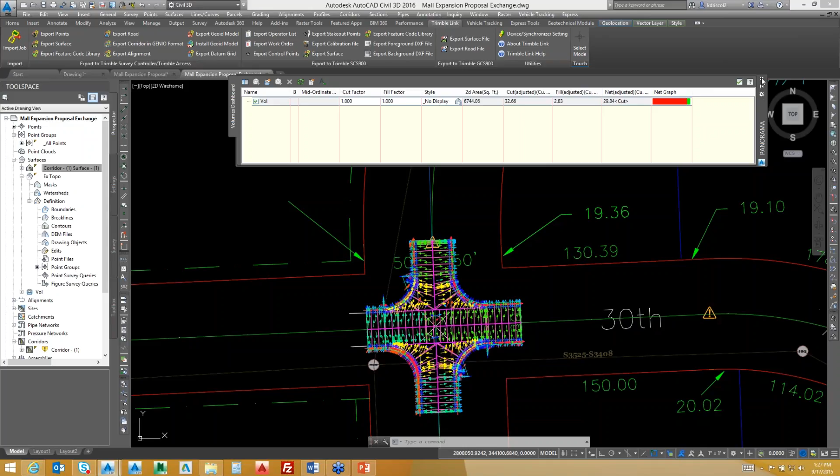So when I say completion, just to finish this off, I'll shut this down, I don't need that. When I say completion, when I come up here to my Manage tab, I can create data shortcuts to share data with design. Also, on my Output tab, I can say I want to create sheets.

So I want to use my east-west alignment, and I'm going to do this really quick. I'm just going to use a template, I'm not going to get crazy out here in reference to my template. So from my sheet set, I need to grab a sheet. So my plan production sheets, it's going to grab a plan production sheet.

And then I'm going to say it's going to be 20 scale. Then I'm going to select next. I'm just going to go through the defaults. And then I'm going to select create sheets.

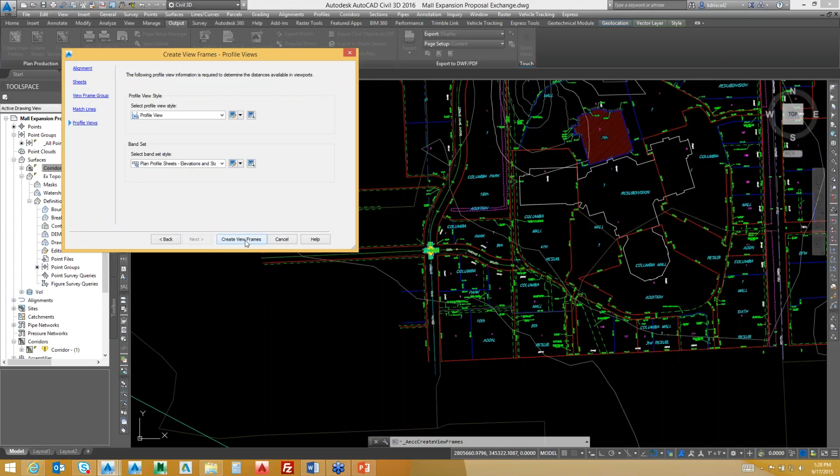How long does it take to create sheets in Civil 3D? Then I'm going to come in, I'm going to save this drawing. And then I'm going to select create sheets. I'm going to select next, next, next.

I wanted to show my existing topo. I don't want it to show a volume in there. I don't want to worry about the profile. So now select create sheets, and it says this process drawing will be saved. And I'll just pop them in right up there.

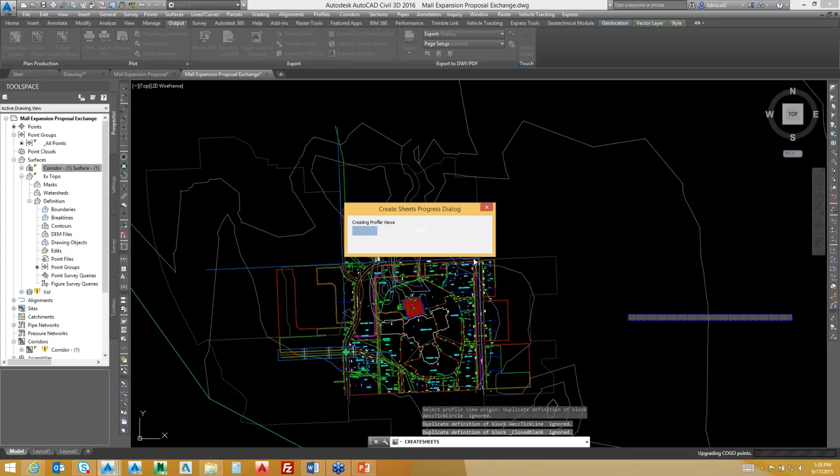As you can see, something funny on my screen—the corridor is updating and things are going on. Then it's saying my surface is out of date for my volume. That's okay, I'm just going to come in here to this.

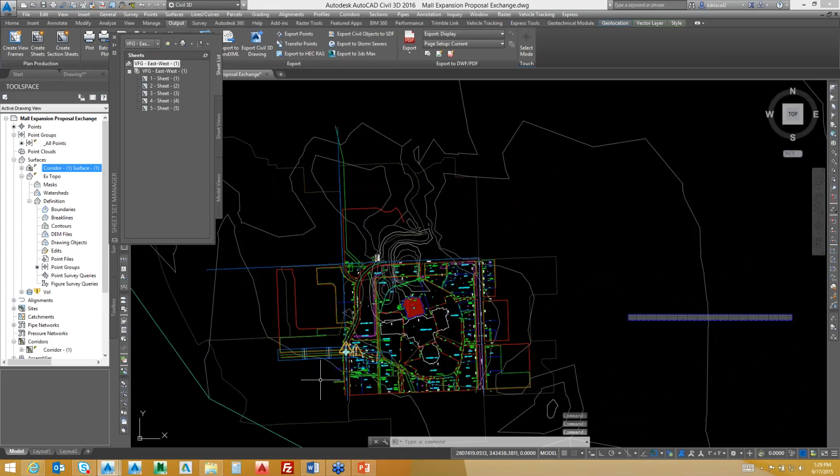Well, I'm not going to do the first sheet or the second sheet, maybe the third sheet. So I'm just going to double click on the third sheet. How long does it take to create plan and profiles with a sheet in terms of what you're doing right now?

This process of BIM not only allows me to make design decisions faster, more accurate, with less omissions, but it also allows me to get plan production work out faster. So if I can create an intersection, if I can create a concept plan, if I can bring in buildings and site work in less than an hour, I know you can too.